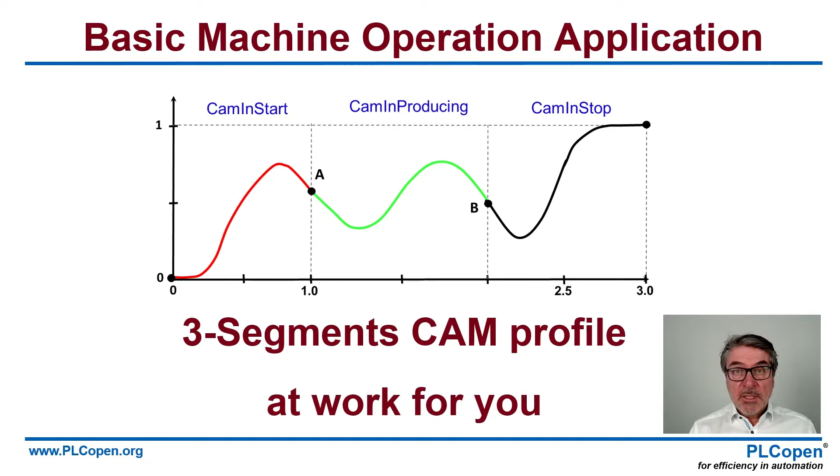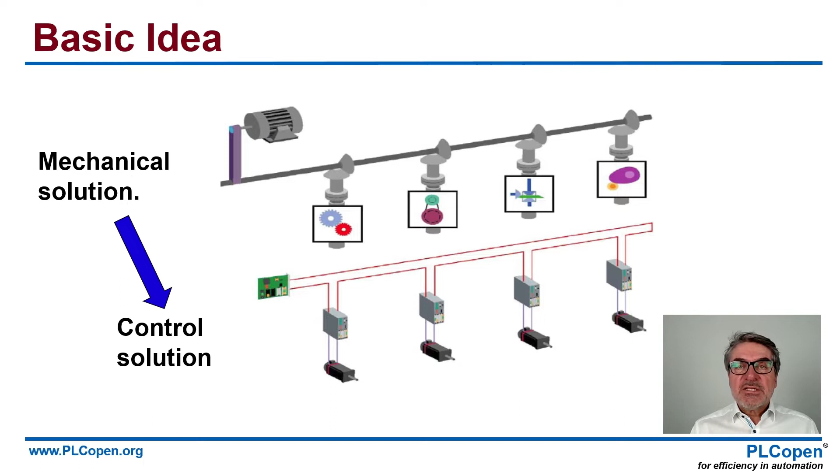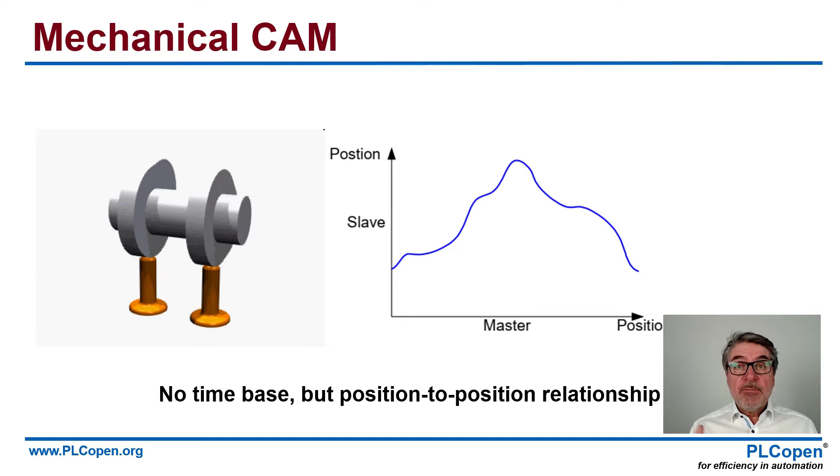If we look to a mechanical CAM, we have a position-position relationship between the master and the slave. If we convert this to a control solution, then the master can become a virtual axis, and we link one or more slave axes to the master via a profile, in this case a CAM profile. And again, this is a position-position relationship through the CAM profile.

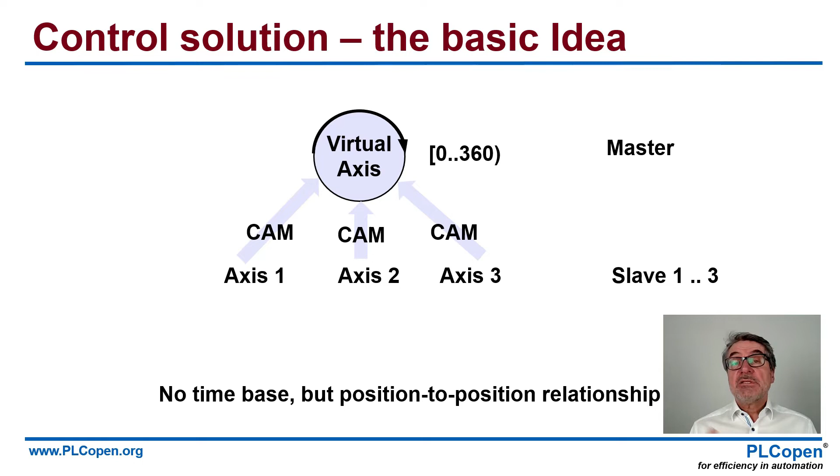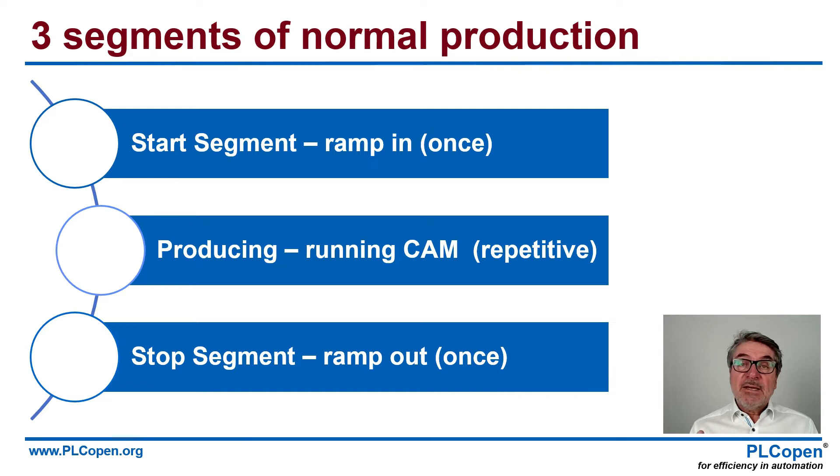So in a normal production, if there are no errors, you see that we have 3 segments. A start segment where we ramp in, a producing where we run the CAM in a repetitive mode, and somehow after so many cycles we stop the production there.

So if you look from a timing perspective of the 3 segments, you see that we ramp in the slave to the master, that's on top. It's a 360-degree cycle every time. So we ramp in, we produce, and after so many cycles of production, we ramp out again. This is a one-on-one relationship, as you see. They're all going in the same pace.

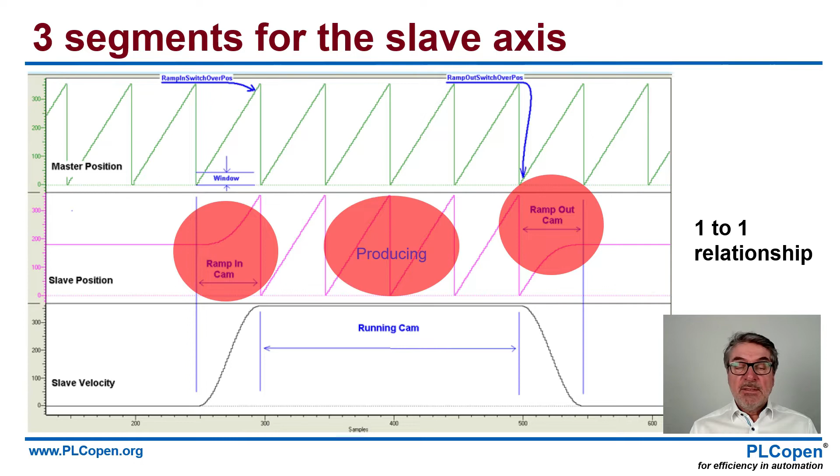For this, we select a CAM table, and we use the function block CAM table select, where you see we have a master and a slave and a CAM table that we select upon. We have a periodic input if we do repeat or we have a single shot. We select if we want absolute or relative coordinates. And we select the execution mode immediately or queued.

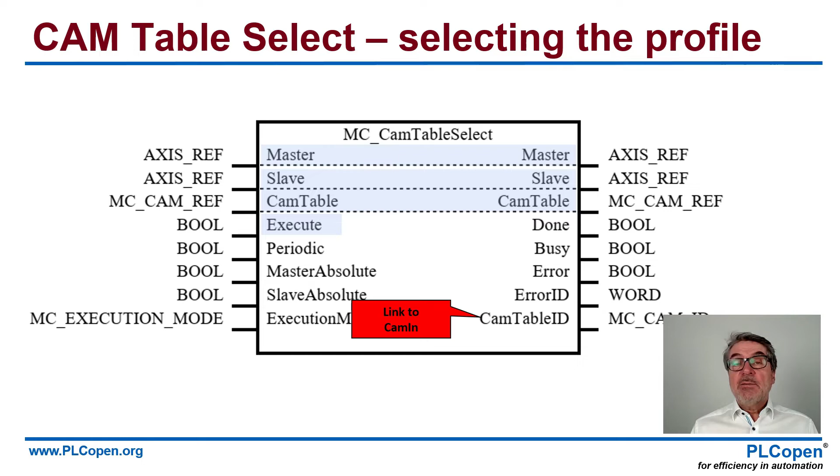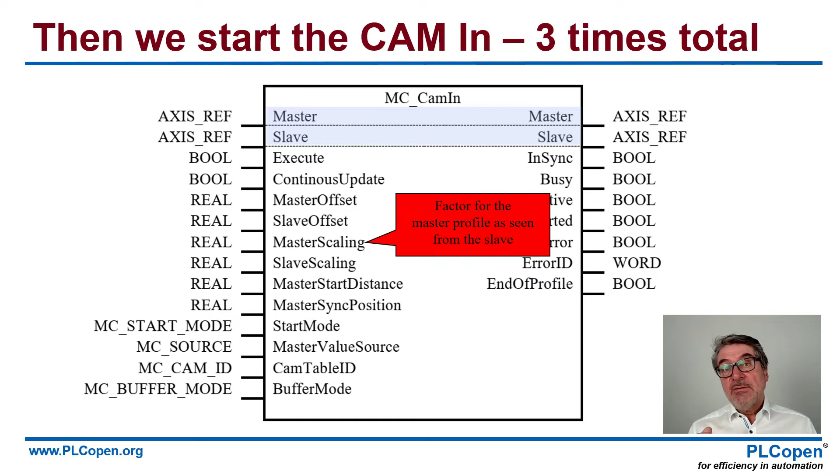And what is important is the CAM table ID, which is the link to the CAM in, the next function block we use. Where again we see there's a master-slave relationship. So we link the slave to the master. And we do that with certain inputs where we can set the offset of the master, the offset of the slave table, a scaling from the master seen from the slave scaling, the factor there, master start distance where we sync to the master, and a master sync position where we sync in the profile.

We have a start mode, absolute, relative, ramp in. We have the master value source, if that's a set value, or the actual value, where do we link to? And we got the link to the CAM table ID coming in from the previous function block.

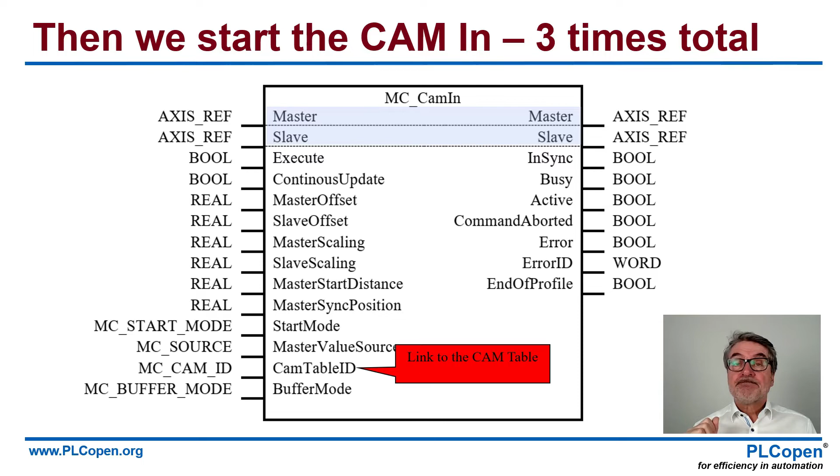We used it 3 times in this case to create this profile. So you see the CAM in start, producing, and the CAM in stopping. We used 3 instances. We could use it with 1, but it makes it unclearer in the program.

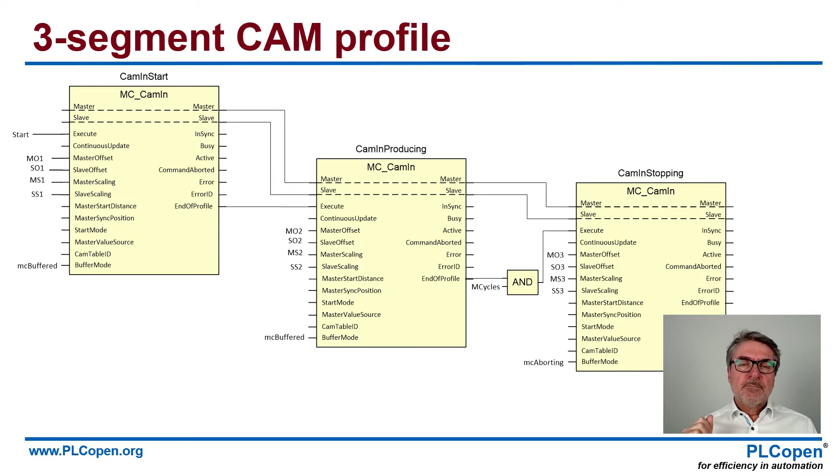So again here you see this link between the master and the slave, which is in a one-to-one relationship. But the idea of a CAM profile is of course that we can change this one-to-one relationship to any profile that we want. That's what you basically see here.

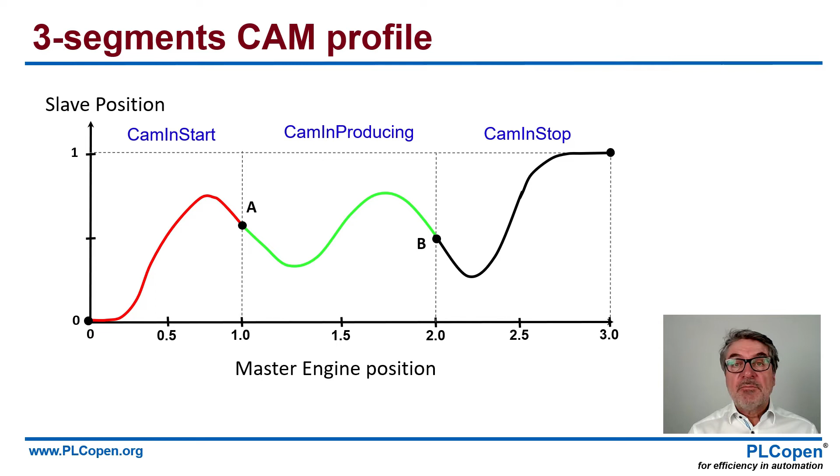So we got a CAM in start where we do a profile. We do a CAM in producing where we do a repetitive movement. This way you see A and B are on the same level and the same curves in that sense. And in the end, we stop this profile again. And that's why I want to explain this 3-segment CAM profile to you.

So here's an example. This is a cut-to-length machine where we have a workstation at the end where we do different operations. So we have the virtual master. We have a slave that unwinds the tube from the roll, that we then, with the slave 2 servo, cut to length, and when it's on the table we turn it around to divide it over the several workstations. And we have the tube clamps to be able to use it while cutting.

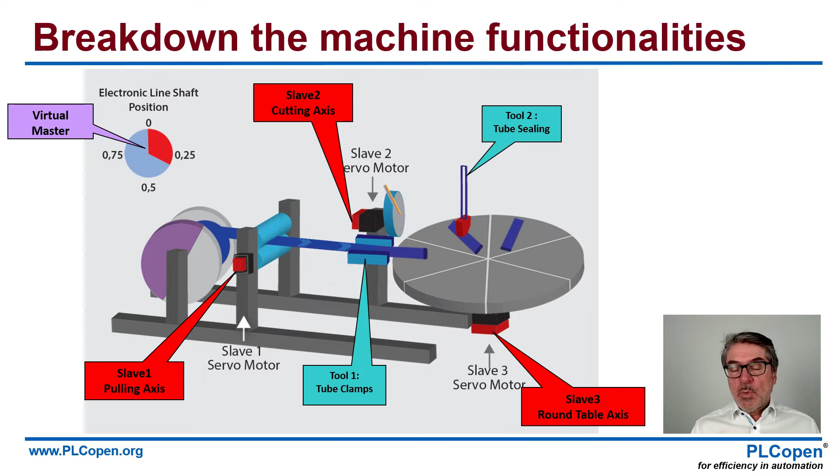And we have one of the tools at the workstation. In this case we can use one for sealing, one for filling and capping, and we can use any other tool there. This is the workstation on the rotating table. This is how it looks. Pull the tube out, we clamp it, we cut it, we put it on the table, and we start working on the table while it is moving.

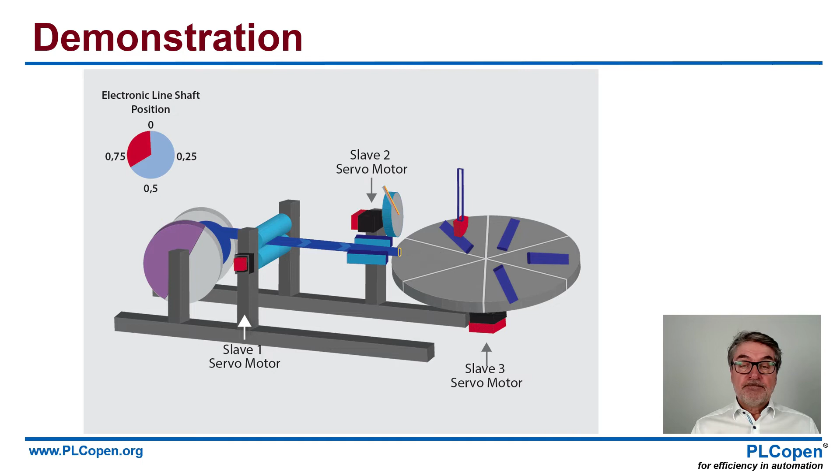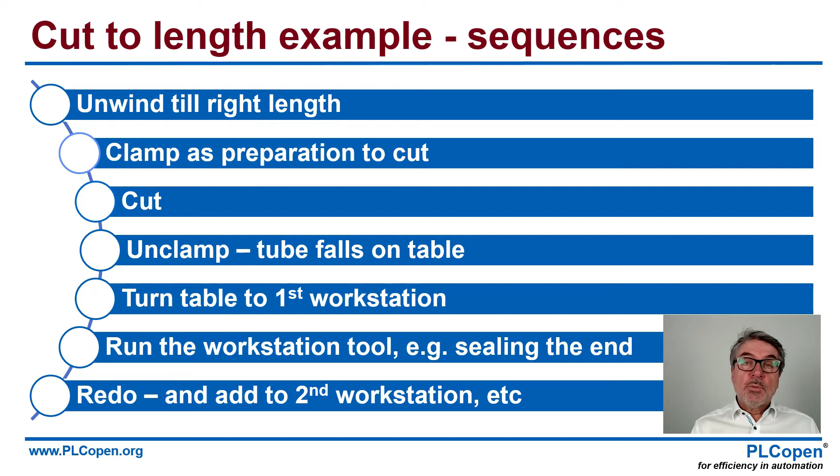So you got several sequences. We unwind till the right length, that's the tube. We clamp as preparation to cut. We unclamp, the tube falls on the table, turn table to first workstation. Run the workstation tool, sealing at the end, and then we redo it. We start another sequence of cutting the tube till the right length.

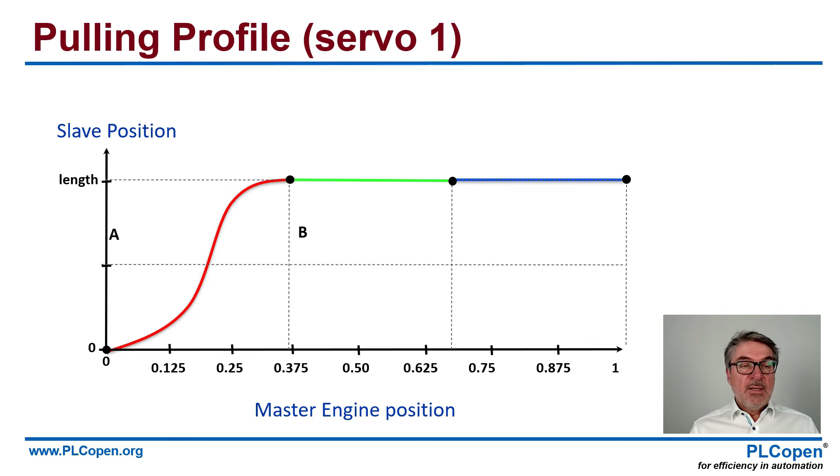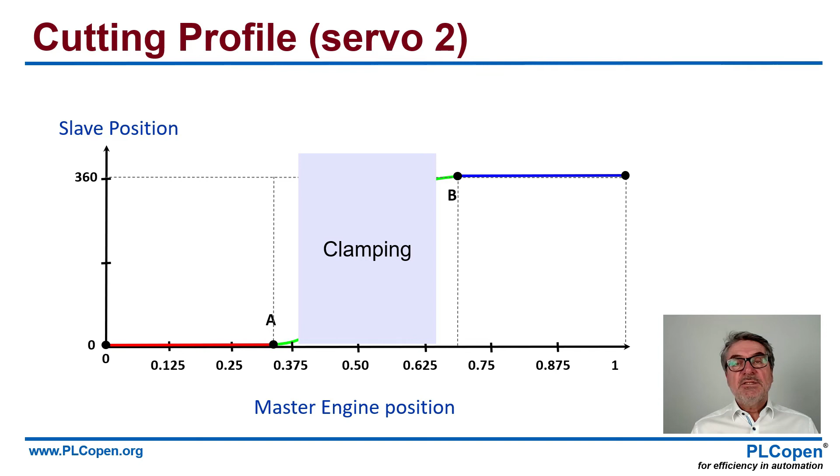If we look to the profiles that we use, for servo 1 we unwind the tube. So you see a master versus a slave, and the slave goes to the required length of the tube. The cutting is servo 2, that's that part. And of course, part of that is dealing with the clamping. So we link that to a clamping functionality. And the third one is the round table.

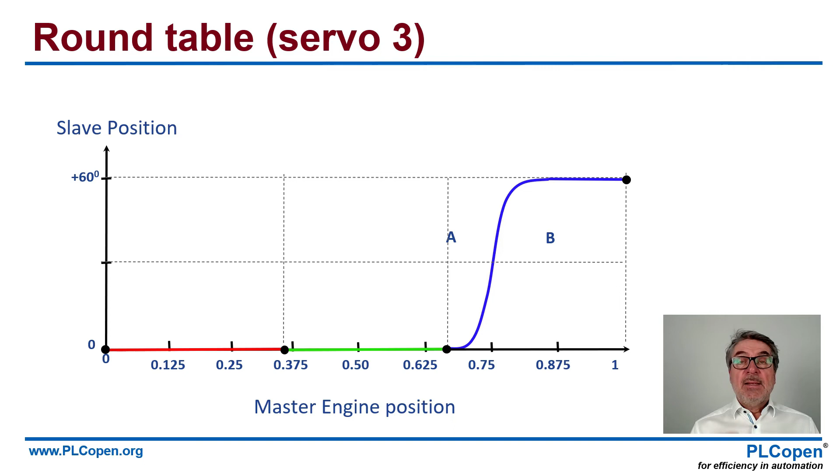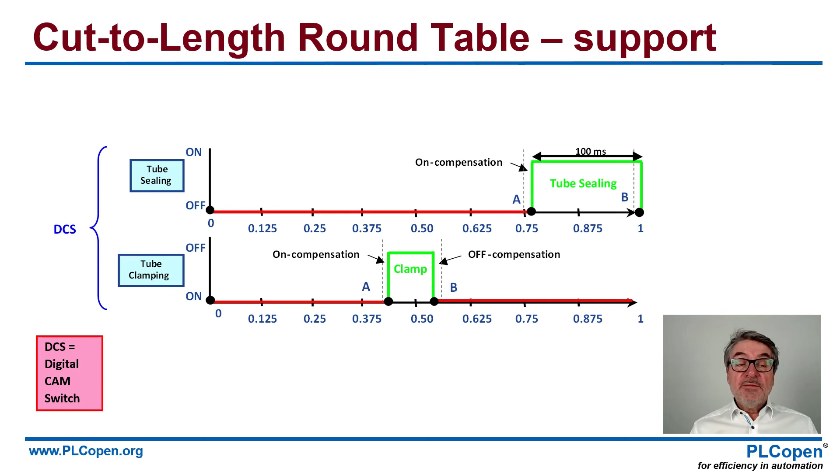If the tube is on there, we turn it 1/6 of a full round, and the workstation works on that part. For instance, tube sealing. That's the first step. This is supported with the two functionalities there. One is the clamp functionality on the bottom, and the other one is the tube sealing on the top, which is on the table itself. And for that one, we use what we call a digital cam switch, that you can link again to the axis ref structure of your master axis.

So overall, it will look like this. And now you can tune all these profiles to make sure that from a timing perspective you can optimize this. So master-slave relationship, but you see that we sometimes have smaller profiles, so you clamp only on a smaller section, or your tube sealing can be done in that sense.

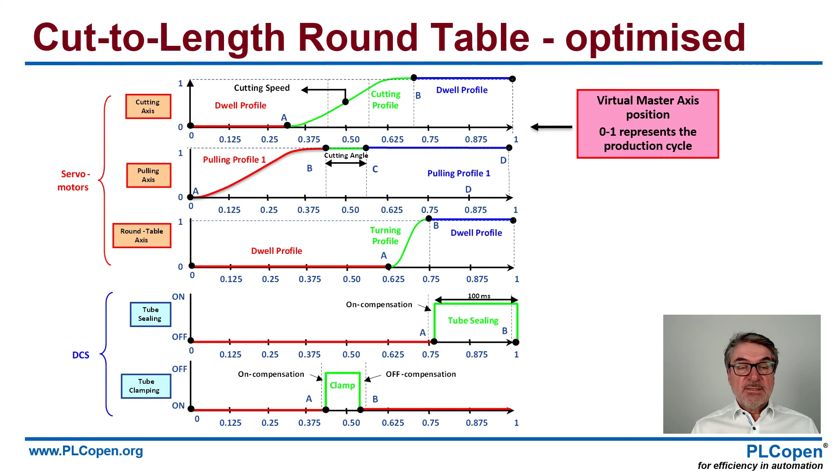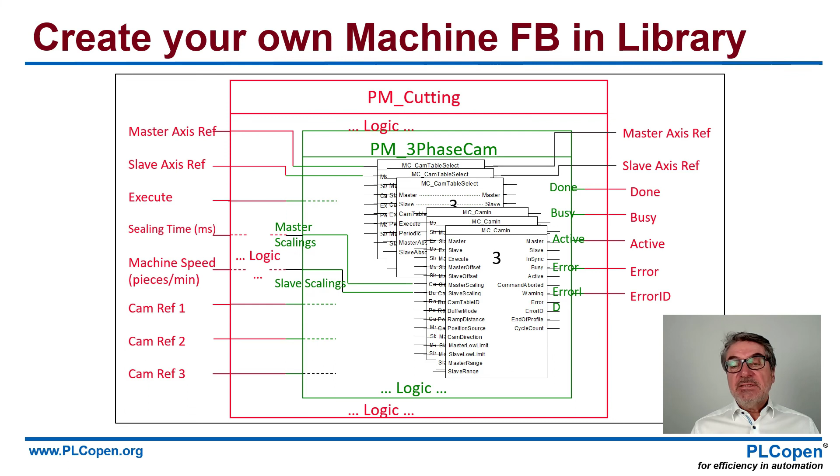So with your 3-segment cam profile and the cam table select, which we need 3 times for the different cam table selections, you can merge them into one function block and one environment. And you can create your own function block out of that one and add it to your library and reuse that over and over again. So it makes you more efficient in that sense.

And efficiency is of course the tagline of PLCopen, the organization behind this all. We merge logic, motion and safety, giving you structuring, decomposition and reuse and less training. On top of that, we add communications, exchange and training, of which this is of course one part.